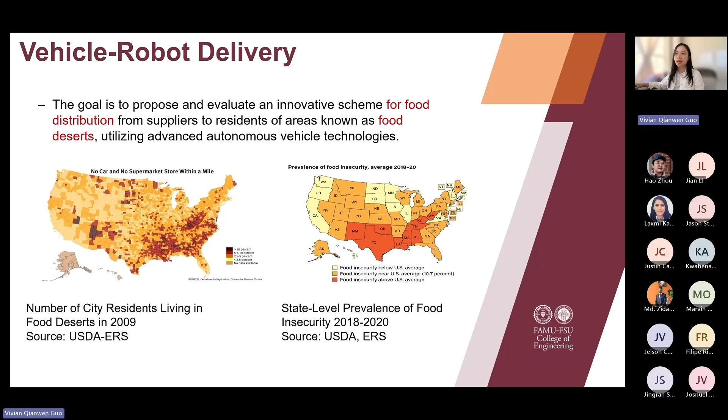This persistent issue of food deserts primarily stems from the absence of a full-service grocery store and transportation. Individuals residing in food desert areas frequently face the challenge of having to travel significant distances to obtain essential groceries, which increases transportation expenses and further strains already tight household budgets. Consequently, there is growing interest in exploring solutions to improve food access in these regions and alleviate the adverse health consequences associated with food deserts.

One proposed strategy is the placement of a public transit route and stop near grocery stores in food desert areas. This approach focuses on the synergy between the transit system and food distribution system, providing reliable and convenient access to healthy food options for low-income residents who might rely on transit as their primary mode of transportation. Recent efforts in cities like Philadelphia and Atlanta have aimed to enhance access to stores that stock nutritious food. This initiative has demonstrated that expanding transit options, whether in terms of geography, coverage, or frequency, may improve food access levels, as community engagement efforts benefit transit-dependent individuals by enhancing their access to food supply.

However, it is still essential to recognize that not all low-income residents in food desert areas rely solely on public transit. Furthermore, public transit routes in rural food desert areas typically have limited vehicle availability and low frequency, making efforts to increase food access somewhat cumbersome due to the challenge of balancing responsiveness and efficiency. To tackle this challenge, we are trying to leverage the emergence of automated vehicle technology as a solution to food delivery.

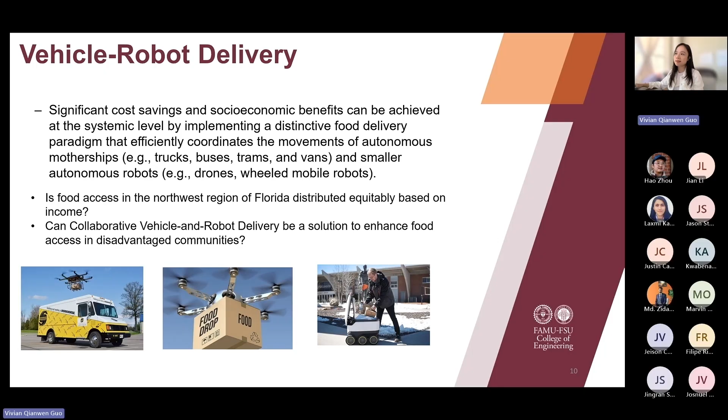The primary objective of this research is to improve food access by introducing a hybrid optimization methodology that integrates integer programming and machine learning. This methodology is designed to facilitate cooperative scheduling and routing for traditional vehicles, ground transportation, and autonomous robots, ultimately enhancing food accessibility in food desert areas.

Both traditional vehicles and autonomous robots like drones are employed in a cooperative capacity, each differing in terms of operational environment, speed, size, maximum payload capacity, and operating costs. By assembling a fleet of conventional vehicles and a corps of drones, whether their coordination is physical or virtual, systemic benefits including heightened adaptability and versatility, and enhanced energy efficiency can potentially be unlocked.

Within the vehicle and drone cooperation scheme, it is important to note that multiple robots, each tasked with delivering food items to distinct destinations, can organize into cooperative groups, yielding collective advantages. Individual UAVs can dynamically join or depart from such groups as operational needs require.

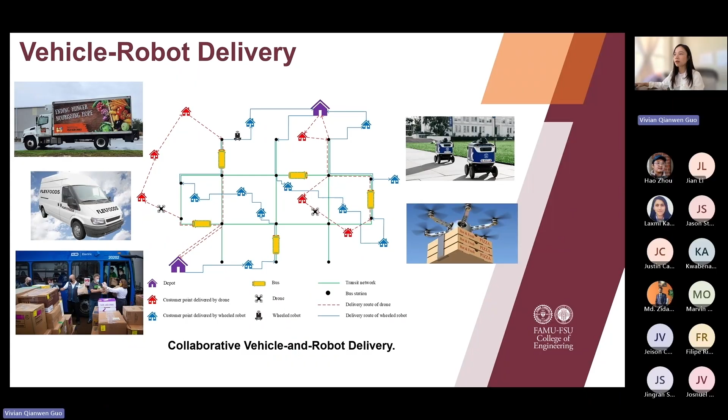Given the limitations in terms of weight and size of drones, especially when carrying large payloads over extended periods, they can strategically piggyback or be mounted onto conventional vehicles with greater load capacity but less maneuverability. The drone can be launched from the truck, complete the customer's delivery, and subsequently dock at a designated position to rejoin the truck once delivery is concluded. Concurrently, the truck can continue serving additional customers along its primary route, later meeting up with the drones at a prearranged location. In between deliveries, the drone has the option to ride on the truck for refueling or recharging purposes.

Another thing I want to mention is that we also work closely with agencies, universities, and industry partners to turn active research problems into course projects. So students are not only solving hypothetical problems, they are working on issues that transit agencies are actually dealing with.

For me, education and outreach are not just add-ons, they are on how we make sure our research doesn't just stay in papers, but also actually moves people, sometimes literally.

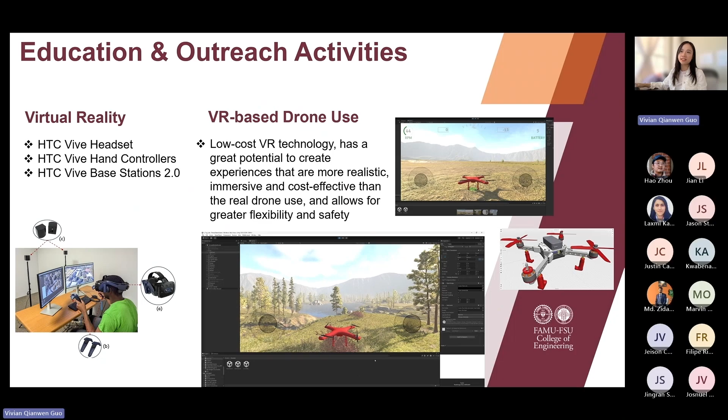So these are some of the virtual reality drone use we developed due to the Florida state. We have a very strict use regulation on drone use. Quite a few places are not able to procure drones for students to do surveys. So we're trying to build this virtual reality lab for students that can make use of the UAV drone for doing their survey work, normally usually conducted in the field.

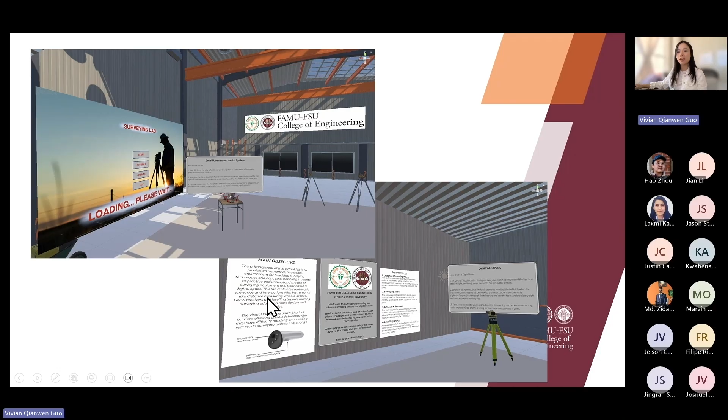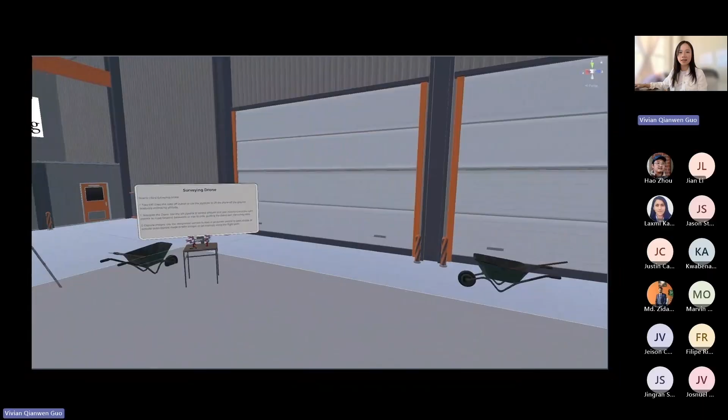These are the procedures of how we developed this tool in terms of the drone. This needs quite a few research hours. We also developed a virtual reality lab for doing the survey using the drone and other equipment. This is the lab. We provide an immersive city area environment, assuming students bring the equipment and do the survey on the site, and we might also include using the drone for flying, doing the research.

So more about the research. Let me delve deeper into specifically what this research topic is about.

We introduce two delivery modes. One is truck-only delivery, which is common in delivery, so the driver will drive the truck and deliver the package to each customer point. The other mode is called drone UAV assist truck for delivery. This delivery mode is considered the most efficient drone delivery mode because it combines the strengths of both truck and drone. Drone can assist with the last mile delivery, which is the most expensive and time-consuming part of the delivery process. By using the UAV to carry out the final step of delivery, companies can save time and money while providing customers with a faster and more convenient service.

However, truck-only remains the dominant delivery method in various delivery systems because of their large capacity and ability to cover long distances. By incorporating the drone into the delivery process, we obtain a faster and more cost-effective last mile delivery mode.

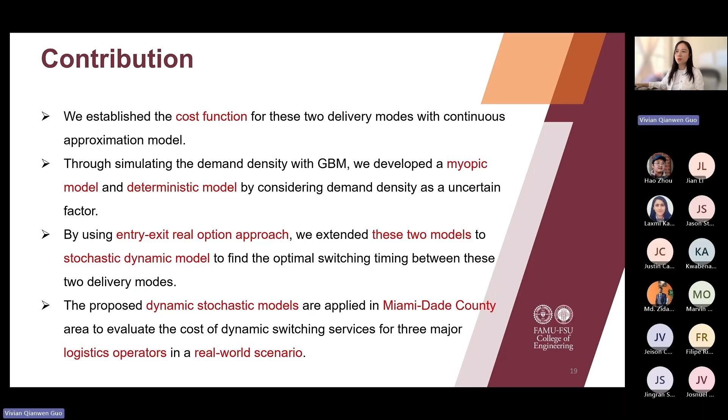With the continuous approximation model, we have two assumptions. One is that the delivery zone is modeled as a compact region and covered by swaths of a width, approximately across the continuous approximation model, which is originally from Daganzo 1984.

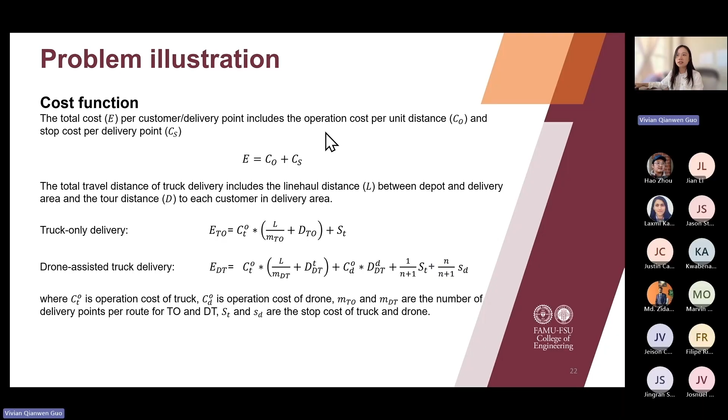Because we require calculating the delivery cost of the entire service area, we need the average cost per delivery point multiplied by the service zone size and the demand density. In addition, we can calculate the overall cost of drone-truck delivery by a similar equation.

These are based on the two cost functions, since we're trying to compare those two delivery modes. By comparing these two cost functions, we can construct a cost saving function when we get the difference between them. And we model the relationship between the cost difference of the delivery system and demand density of the service zone through the baseline value.

When cost saving is greater than that, it means the truck-only mode will need greater cost compared with the drone-truck mode. According to our result, truck-only delivery is better than drone-truck delivery when demand is relatively low, because the total cost of drone-truck delivery is higher than that of truck-only delivery.

Otherwise, it would be a waste to introduce the drone at low demand density, because introducing it requires additional operating and procurement cost.

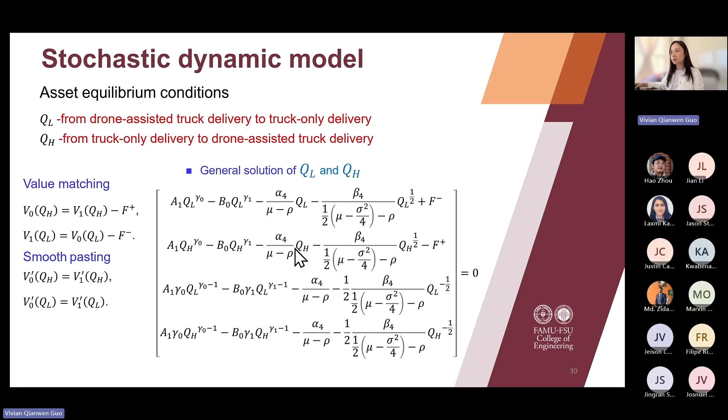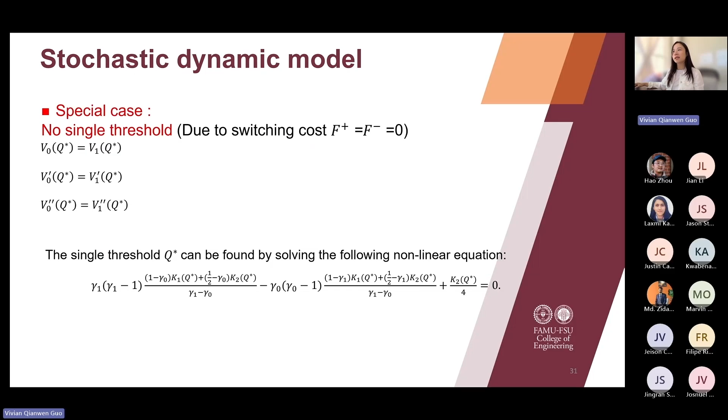For the special case where the switching cost becomes zero, the upper and lower threshold will converge to become a single threshold. With these above three equations, we can obtain a nonlinear equation. Through solving this nonlinear equation, we are able to calculate the optimal switching timing without the switching cost.

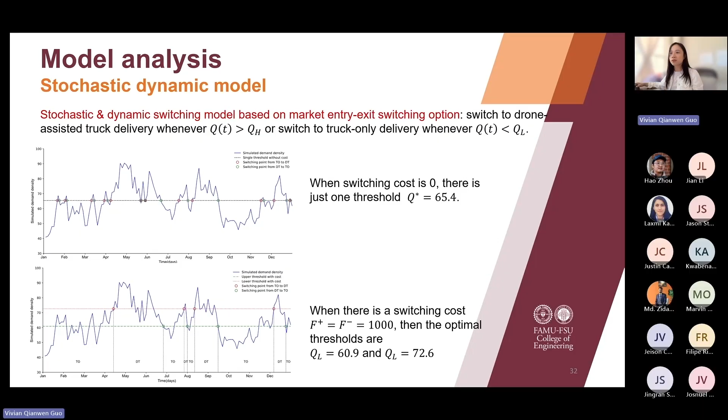When the system needs to consider the switching cost, we get two thresholds based on the stochastic switching model - the ideal thresholds are upper and lower bounds. According to this model, switching timing will be delayed because switching costs need to be considered, creating hysteresis effects. Therefore, our switching points are much less relative to a stochastic model that does not consider switching cost, which can be shown in the second figure.

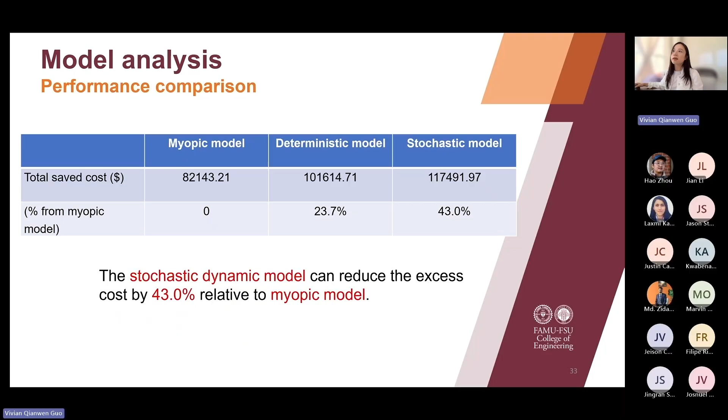So we also apply a multiple option approach. We design a scenario with multiple policy options rather than just two, making it particularly useful for a large region with multiple service zones. This model allows for a gradual transition in response to different demand densities, rather than an abrupt shift from a full area of truck-only fleets to a complete drone-assisted truck fleet.

Initially, the truck-only and drone-assisted truck fleet operations can be introduced in higher demand areas, while truck-only service remains in lower demand regions. As demand grows, the transition expands incrementally, eventually leading to a full area of drone-assisted truck deployment. With multiple drone-assisted trucks, it could increase from two drones mounted on one truck up to 10 drones mounted on one truck.

So this phased adaptation optimizes resource allocation and avoids the high operating costs associated with an immediate switch to a full area of drone-assisted truck fleets across the whole region.

Under the static analysis, the scenario with the lowest cost changes depending on the demand density. For lower density, below 58, truck-only has the lowest cost. When demand density increases, a hybrid mode, with more drones mounted on the truck, will become a more optimal choice based on cost for demand density.

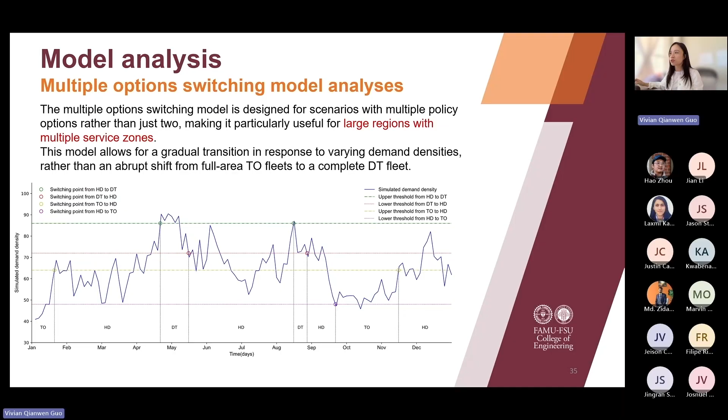Then the demand will fall back to the lower threshold of stage one, and we first switch from the drone-assisted truck mode back to hybrid mode. If it continues to fall back to the lower threshold of stage two, we will switch from hybrid mode to the truck-only mode.

So we not only study the modeling, like the mathematical proposition, but we're also interested in deploying our model to the practical area. So we select Miami-Dade County as the piloting place, with the base year of the dynamic switching model set in 2021.

According to the census data, approximately 2.6 million individual residents live within the Miami-Dade County area. 65 package deliveries are generated per person in the year 2021 in the U.S. Utilizing the census data, we found that the land area of Miami-Dade County is about 2,431 square miles. Consequently, the average population density is 1,000 persons per square mile. Therefore, we estimate the average daily delivery demand in Miami-Dade County to be about 195 packages per square mile.

There are three logistics operators - USPS, UPS, and FedEx - that dominate the parcel delivery industry in the U.S. The combined parcel volume handled by these three companies is nearly 80% of U.S. parcel delivery in 2021, based on the literature. The table provides the daily demand density from the three companies, determined based on their respective market shares.

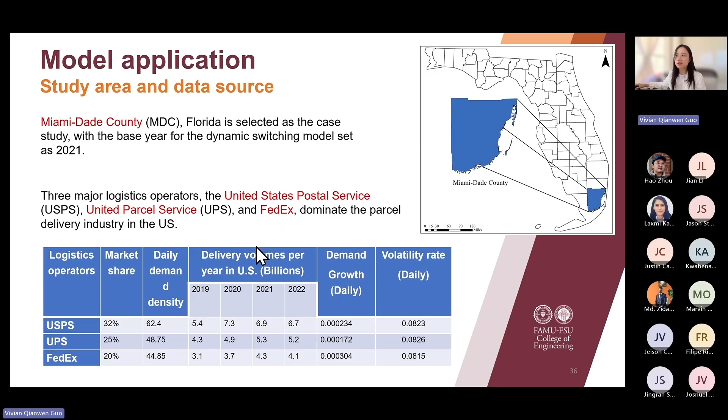The demand growth rate and volatility rate for these companies has been determined using performance data sourced from the Pitney Bowes report in the literature.

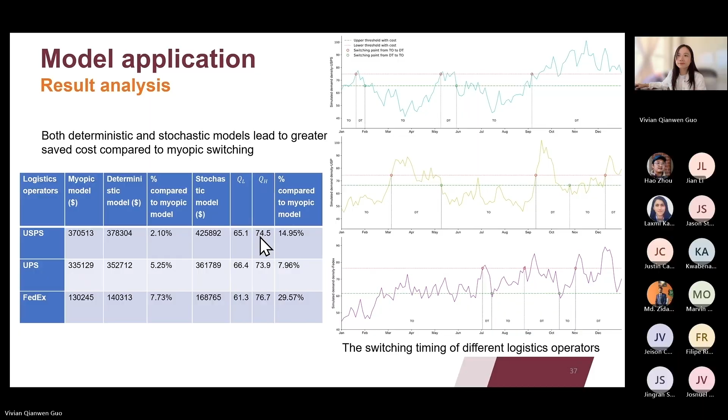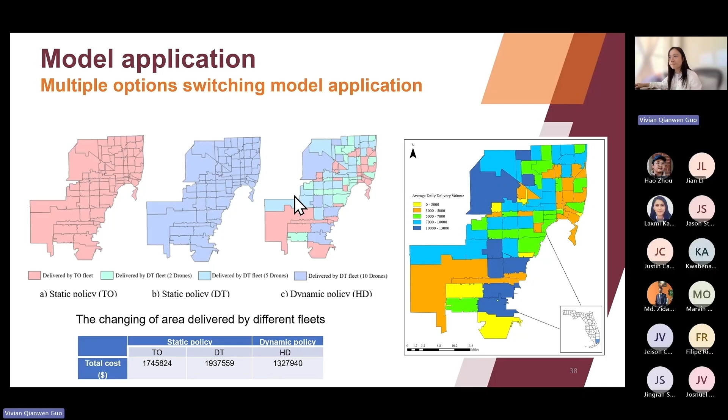When switching from one mode to the other, it will involve cost, so the switching points will become less. It will also be delayed because of the need to satisfy the benefits by each switching point, which must be greater than the switching cost.

Drawing from the market entry real option, a stochastic model is proposed to find the optimal switching timing. We found that this model can result in a 43% reduction in cost compared with the myopic policy over one year of simulated demand density.

Our model has been demonstrated in the Miami-Dade County area with data representing the three major logistics operators: UPS, USPS, and FedEx. We found that our proposed switching model can greatly help them reduce cost. This case study indicates a simulation outlining the delivery service plan for each logistic operator.

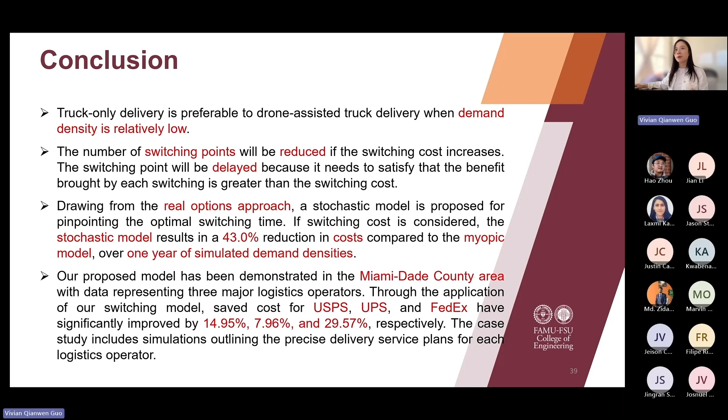In the future, the geometric Brownian motion can be extended to a mean reverting process, which is more suitable for transportation, because demand fluctuates to simulate future uncertainty, but finally converges to the mean value. So maybe the mean reverting process may be more suitable.

We could also consider that demand in the future could jump or drop significantly due to unexpected events like COVID-19. Such events result in people buying groceries or shopping online, and in-person demand may be significantly reduced. So demand density can be expressed with jumps integrated into the geometric Brownian motion to quantify how logistics companies can better plan and integrate drones for delivery.

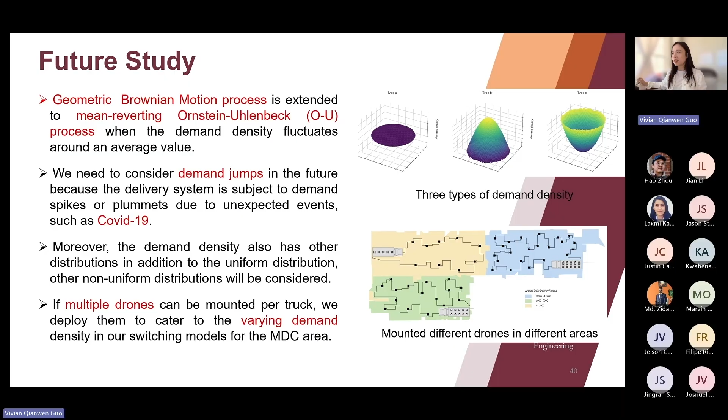In our forthcoming research, we hope to jointly determine the optimal switching timing and varying zone number, like the zone capacity, with the density characteristics unique to each region, analyzing the shifts in benefits corresponding to the number of zones. This is the future research direction.

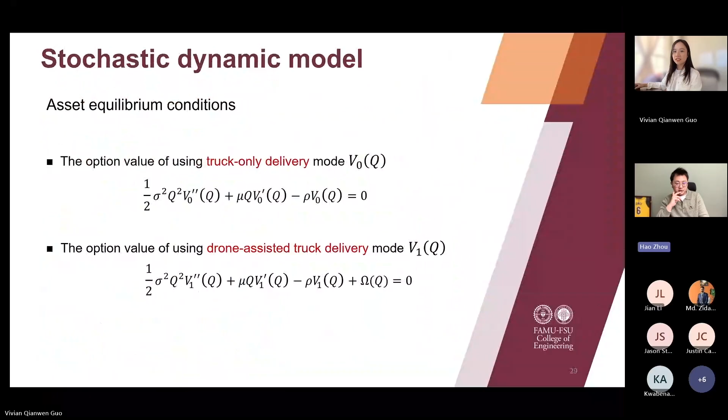Thank you, Qianwen, wonderful presentation. Due to my oversight, many students were not able to join at the very beginning. So I'm wondering if you can give them more information regarding the background and context of the problem, like why we are looking at the switching problem and why we consider uncertainties in demand, so they can have a better idea about the whole context. Thank you.

For example, the truck may only serve the major arterial, and the drone might fly into the communities to save time, energy, and fuel cost. Whenever the truck is on the major arterial, the drone will fly at the same time to multiple delivery points. Then when the truck moves to the next customer, the drone will fly back, mount onto the truck, rejoin, and then fly out again to deliver to the last point.

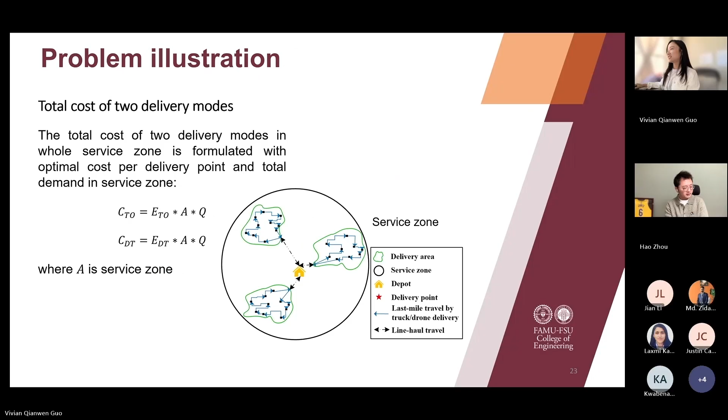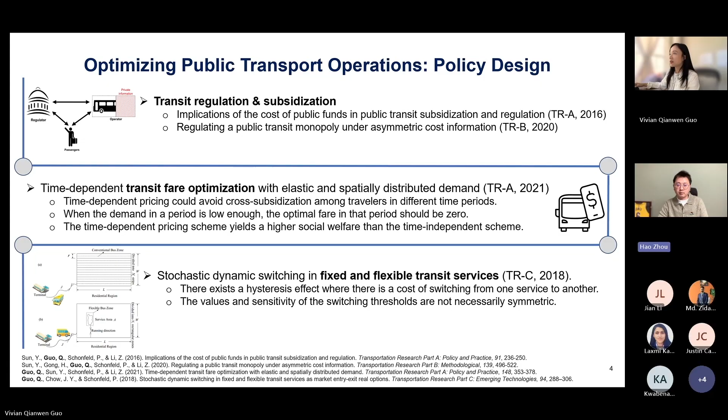So Qianwen, I'm wondering, for a typical scenario when a truck driver needs to deliver packages on a certain day, that would mean the truck has a known number of loaded packages, right? Yes. So can you explain where the uncertainty comes from? Is it from a strategic perspective of the company over time, or does it result from other sources?

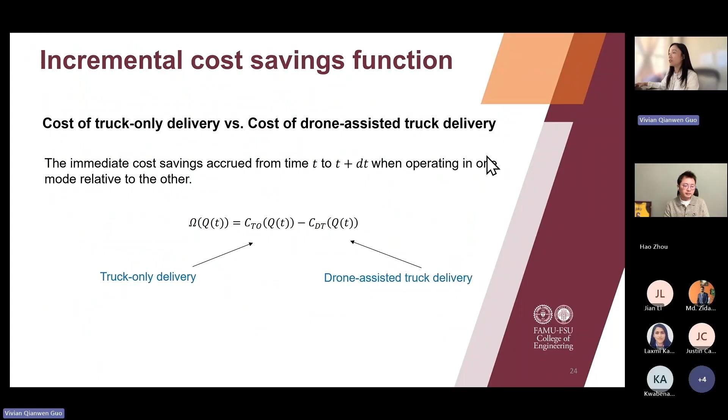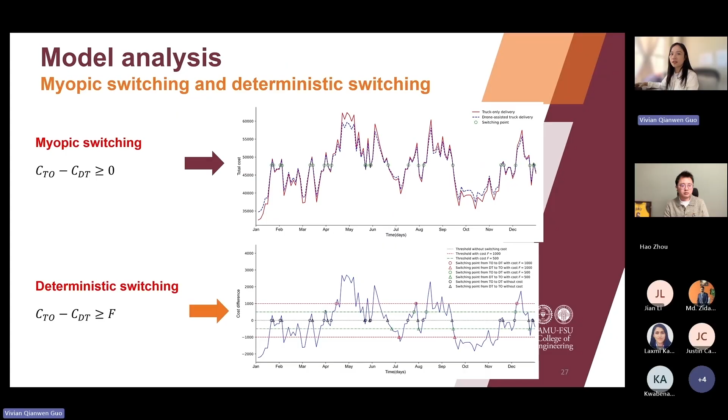Yeah, that's a great question. The uncertainty we quantify is from the demand side, the needs for delivery. We did not work on the supply side or the logistics company's operating side uncertainty. We only quantify it could be due to reasons like COVID, or the season becoming cold, or it could be just because of a holiday when people have needs for buying things online, resulting in uncertain demand. We also made use of UPS, USPS, FedEx data showing their monthly and daily delivery package volumes, using geometric Brownian motion to calibrate those parameters.

Yeah, thank you for clarifying that. I'm also wondering, do you see any potential for this hybrid delivery mode during disaster or adverse weather, which we are having now in many other states? I feel like sometimes it's not only about saving cost or time efficiency. In certain adverse weather conditions, maybe drones would have the unique advantage to deliver goods - that might be the only option. So do you agree with that, and if so, can you explain how we can use your framework to approach the problem?

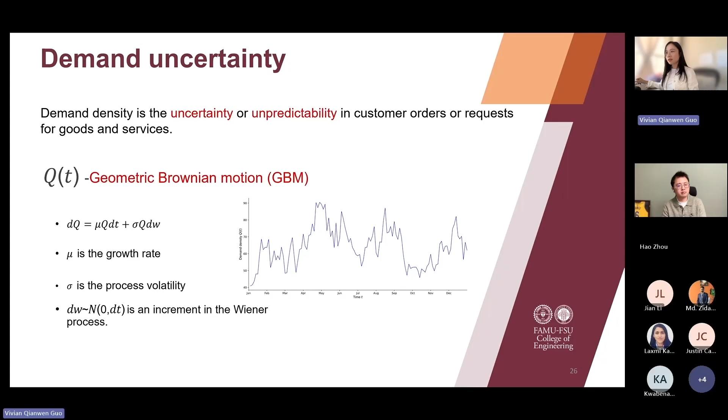We can also quantify this - since people who live in the region have needs that might use an uncertainty like a jump diffusion process, adding volatility to the demand side, and this can be extended. For example, currently we only consider a continuous approximation model, considering the average travel distance in a general rectangular region or general area, but this work can be extended to a network base. So in a disaster scenario, when some roads and links become inaccessible, we could make use of the drone flying instead of using the truck to drop items nearby.

Yeah, so maybe we can transfer the accessibility problem to distance. Like if this location is not reachable or accessible by the truck, maybe the distance to that location is infinity. So yes, under this framework, maybe we can see what will happen.

Maybe if the benefits of drone will be more amplified, we can see the great potential of this hybrid mode. Yes, in the disaster framework, it could adjust the objective function, which is different from the economics perspective. In a disaster scenario, we might just consider the unmet demand, trying to minimize the unmet demand while flying the drone. Yes, that'll be great.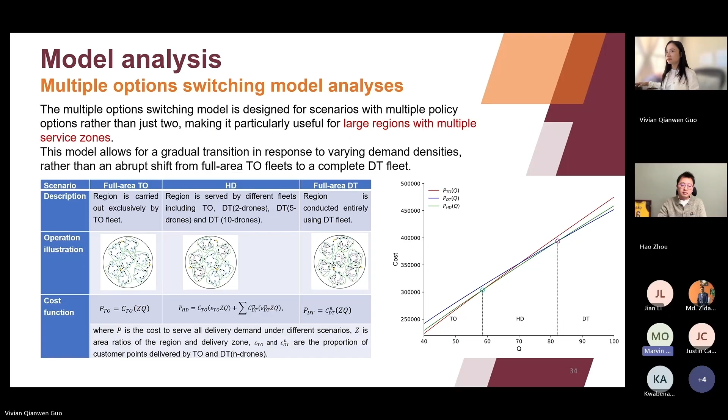First of all, I want to know the software you use to develop the virtual reality drone game. The second one, I wanted to know the safety concerns with drone delivery, because on November 18th, Fox News reported that Amazon's drone hit an internet cable, which was like an invisible structure. So how is research being done to ensure that these problems do not happen during drone deliveries?

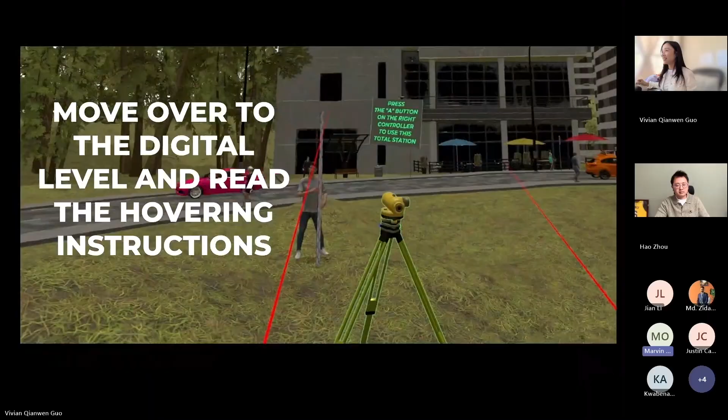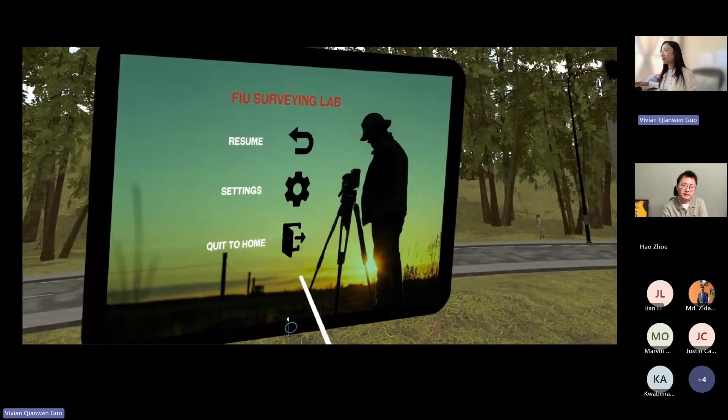Thank you, that's a great question. First of all, the drone virtual reality system we developed, we used Unity. Unity is open source for free, so everyone can make use of the resource through the Unity system. My student just made use of this tool to develop this platform, and similarly with the drone, also the same.

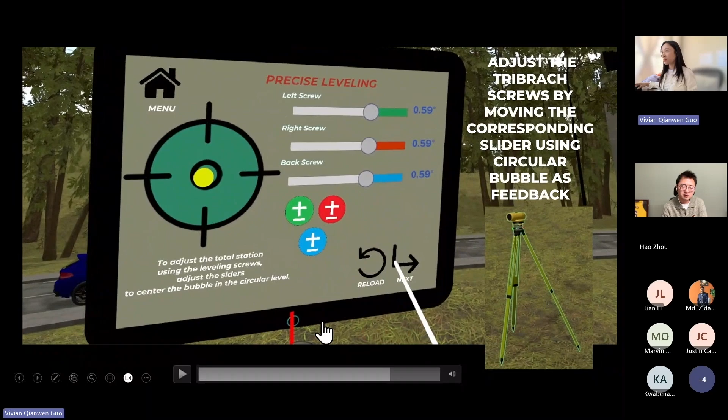The second question, I wish I could answer that fully. Yes, we do find there's quite a lot of safety concern. Due to the safety concern, FDOT and most public institutes require you to have a flying license for the drone UAV, and also get approval, which is not very straightforward to obtain. That's why we need this virtual reality for helping students with pre-training, and we can also propose to FDOT a workforce development program, teaching how to help people make use of emerging technology such as the drone. Those using UAVs have to receive essential training and background knowledge on how to use it and the safety concerns involved. I think there's great potential to propose to those agencies to get such support.